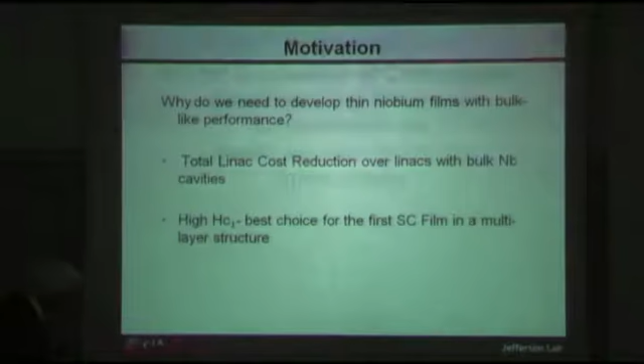major problem that has been referred to over and over again and even discussed here today: niobium, thin film niobium, and what has to be overcome. Not that there are any new techniques for creating films, but it's important to focus on the steps we take to understand what we have, so we know where we're going. So I will try that.

Why do we need to develop thin films with bulk-like performance? Go to the second bullet first. If we have a high HC1, or let's say a clean film, because it's not simply HC1, that's the best choice for the first superconducting film in a multilayer structure. If you build up too many low HC1 films, you will eventually run into problems of thermal issues.

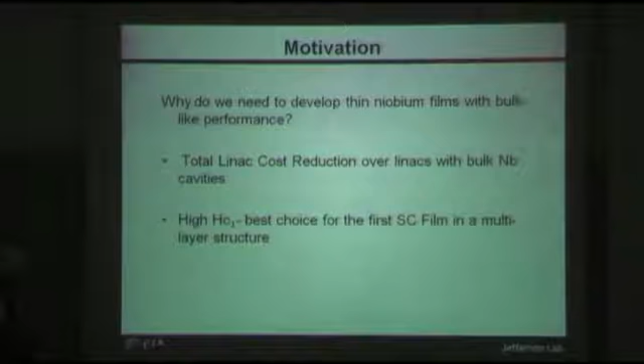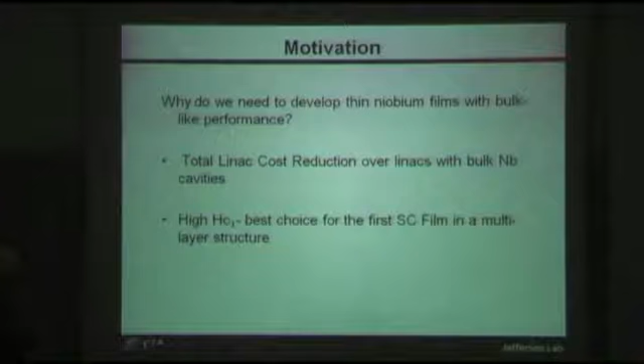The other reason, I think, is becoming understood now, but for a long time there was a misconception that the basic issue was saving niobium, the cost of niobium. It's really that you can use materials like aluminum or copper, both relatively inexpensive in high purity form, in shapes that are quite formable, much cheaper to make, and most importantly, you can integrate cavity cryostat functions so that the overall cost of the LINAC module is dramatically reduced.

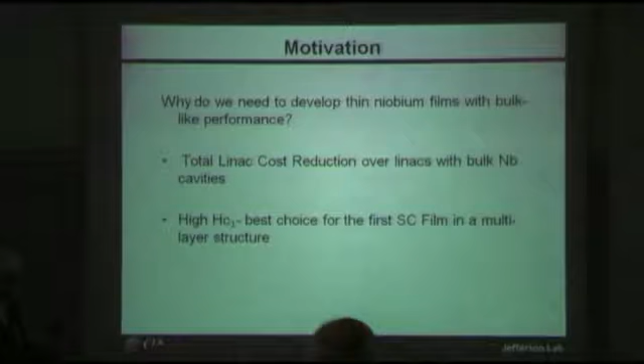I step out on a limb talking about factor of 10 sometimes. A lot of people will disagree with that. But many functions can be engineered out of the structure, such as you have with sheet metal, such as microphonics, the various acoustic modes that occur in flimsy structures like that. Ponderomotive oscillator—we call these Lorentz force detuning these days.

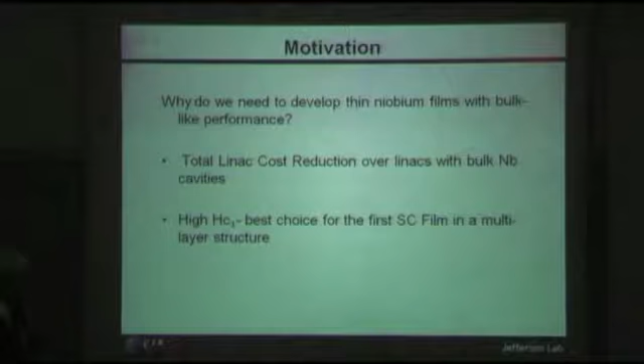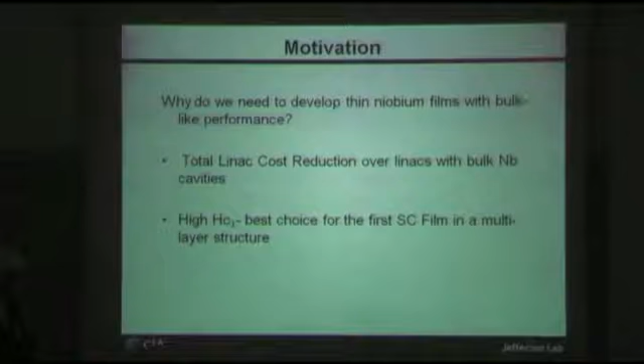If you imagine a cast structure with fluid heat exchange surfaces cast in, as well as stiffening ribs and so on and so forth, the cost of doing a one-shot casting like that is vanishingly small. The ultimate issue is surface preparation of the inside, as it is with any structure. So those are two, I think, overriding reasons.

And I'm not going to talk much about conventional sputtering, even though I'm comparing that to energetic condensation. Everyone is familiar with the type of severe Q droop, the non-quadratic losses that you get within niobium films. The CERN group over many years has done a fantastic job of analyzing and doing experimental work on those issues. So I won't go into those.

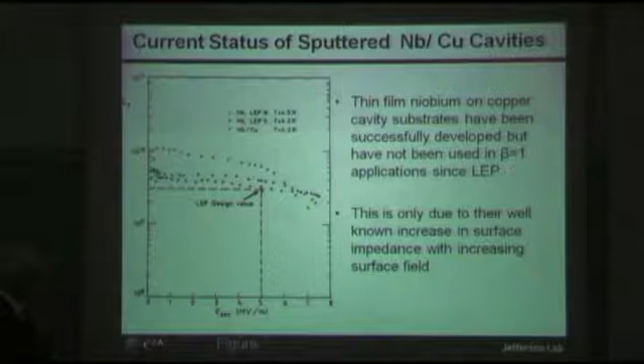But this, I would also say, is probably the only reason I can think of that has kept niobium-copper cavities, thin film niobium, from being used in actual applications for beta equal 1 applications anyway, since LEP. I think there's no reason for it other than that.

I've already mentioned this. Much work has been done examining the non-quadratic losses and nonlinearities using various techniques by many laboratories. They've all been discussed, including here before.

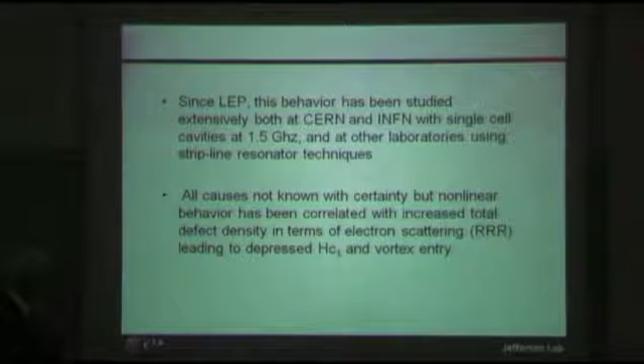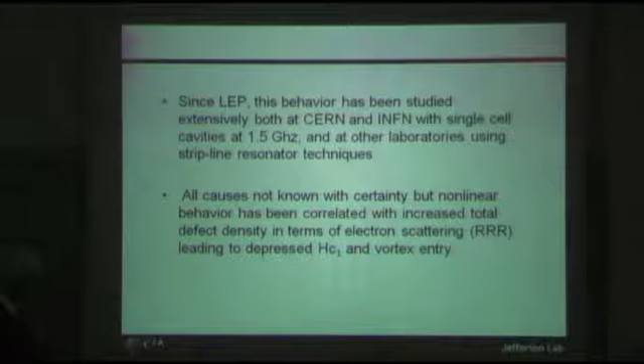The major cause, really, that I think is in everybody's mind for the nonlinear behavior is the very short electron mean free path, and it will severely depress the lower critical field. This is aggravated, of course, by—someone already mentioned today—rough surfaces, where the field enhancements will allow it to enter more quickly. And then, as Alex pointed out, there's also the other issue that involves the energy gap, but they both involve—the primary cause still is a low HC1. I mean, a low mean free path, electron mean free path.

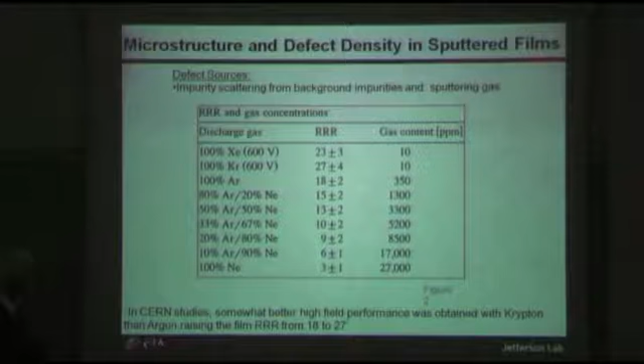And you could lump all the things that cause electron scattering into two groups. One is, in the case of sputtered films, the sputtering gas inclusion, and the other would be structural defects from the niobium film itself.

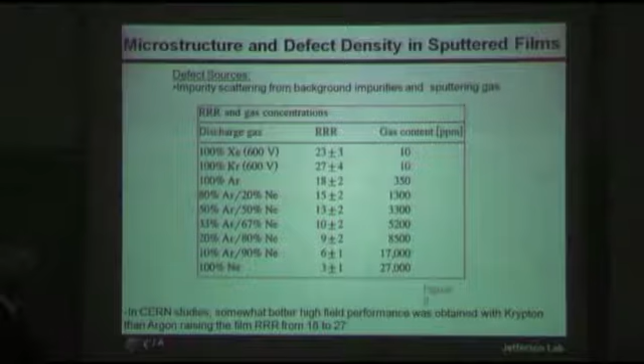And this is a table from one of the CERN papers, a very nice study showing here for the conventional argon that everyone uses, a very high gas content. For krypton, which they have also used, it gave some improvement in actual RF results. Here, the improvement in triple R is significant, but not dramatic.

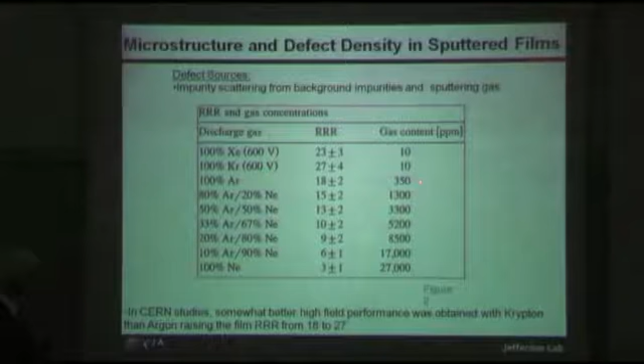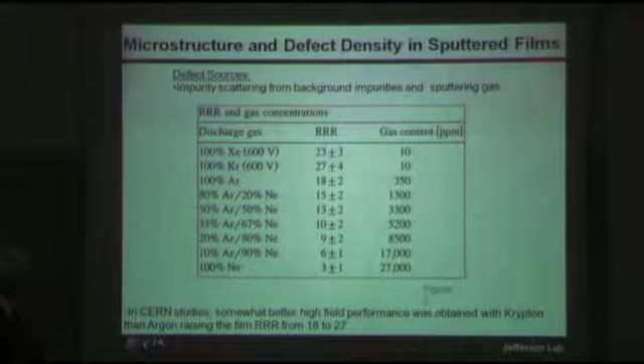And I think that's probably due to the fact that even though there's this reduction in gas content and there are different scattering sources anyway, this is probably dominated by structural defects from the nature of sputtering as a deposition technique.

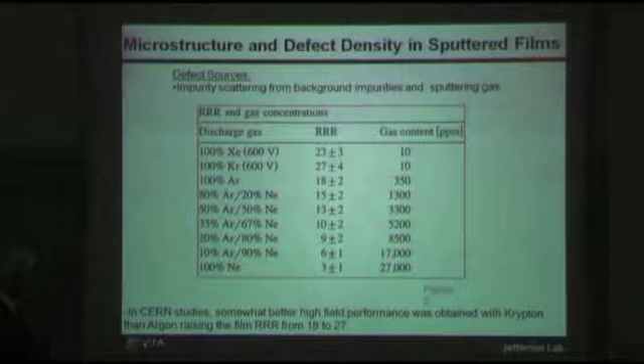Just to repeat, this is a little history. The two film structures explored by CERN were a fiber structure, created by oxidizing the copper surface to destroy epitaxy, and large grain heteroepitaxial structures.

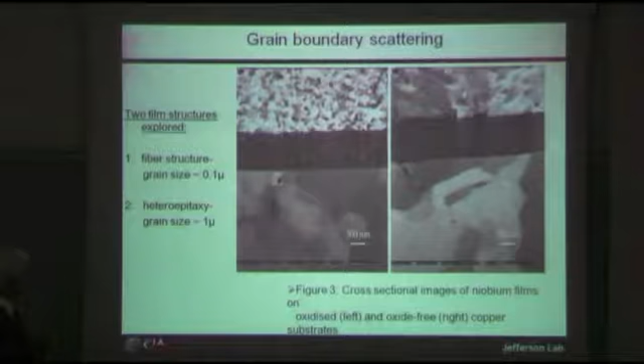I think I mentioned on the next slide the mean free paths. Here they had one sample, this is a columnar structure. I'm sorry, they're both columnar, but this one is a fiber structure, and the other was a single heteroepitaxial structure. In both cases, the grain dimensions can't account for this kind of RRR.

If you had a 1 micron grain, the electron mean free path you might expect would be greater than an RRR of 500. And substantially greater, since the scattering of a grain boundary isn't perfect anyway.

The transparency depends on the grain angles on either side. In the sputtering case, since the sputtering energy is so low for the condensing film, the predominant source for a high melting point metal like niobium, with a very low substrate-to-melting-point temperature ratio, the predominant electron scattering defects you'd expect, both from simulation and extensive literature, would be...

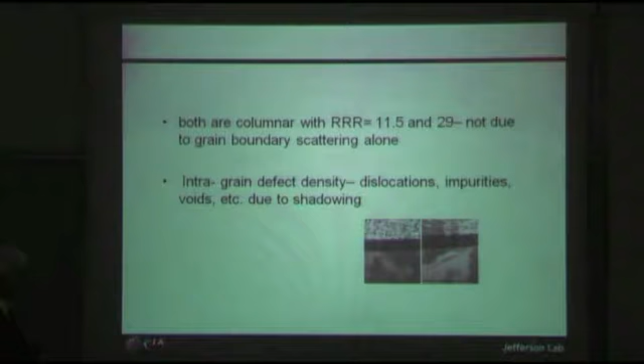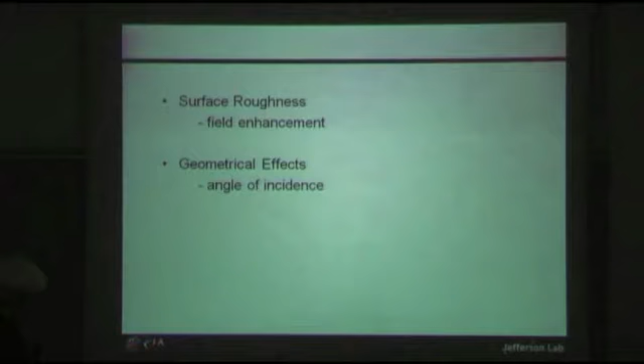It's surface roughness, we've already discussed that. Geometrical effects, also the angle of incidence, has been studied in terms of RRR here at this lab, at Legnaro, and elsewhere, and shown that more glancing angles have a more severe effect in reduction. These effects can be avoided. Surface roughness is an issue in any process.

There's some things we don't know about sputtered films. When we measure RRR either on an insulator or by removal from copper, you're measuring the whole average RRR of the whole film. We have no idea how this varies from the onset of nucleation, where we know the RRR is extremely low as the film gets organized, to what its final value is at the penetration depth, which is what you care about. So what is the RRR at the penetration depth?

We've tried, jumping ahead a little bit, to come up with schemes for measuring this easily. There aren't any, but there are some schemes we're exploring for doing it with a little more pain, though it can be done. We don't have that in hand yet.

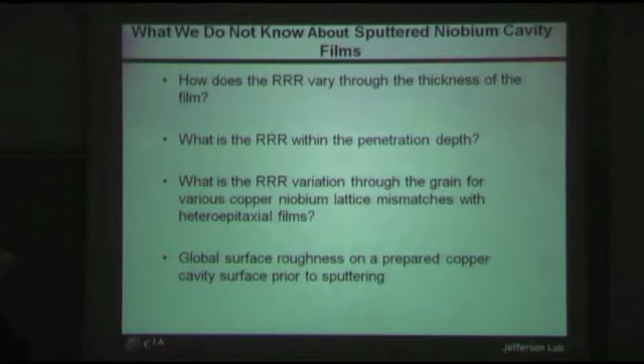The other interesting thing is, in the heteroepitaxial case, the niobium picks up the nearest lattice match of the underlying copper grain. This will start the film off with a lot of misfit dislocations that would vary from one grain to another. We don't know what, and also the fact that you're depositing each grain on a different crystal plane as it continues its columnar growth to the penetration depth.

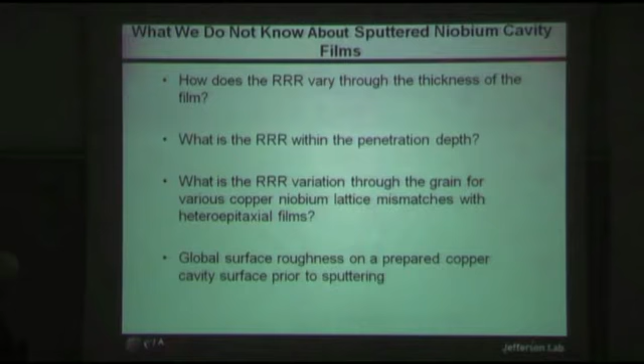None of those things we really know. With energetic condensation, we can avoid many of the problems with conventional sputtering.

Here we're looking at just one form of energetic condensation, that of niobium ions deposited in vacuum at controlled energies. The two major differences between this technique and deposition by conventional sputtering are the energy added to the film as it condenses layer by layer, and the lack of gas ion scattering, in addition to gas inclusion in the film.